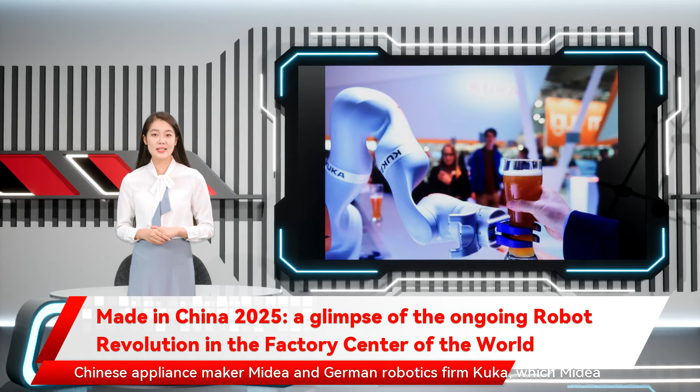Just a few miles away, work is underway on an 800,000 square meter, 10 billion yuan industrial estate that will house three ventures between Chinese appliance maker Midea and German robotics firm Kuka, which Midea bought in 2016. The new complex will have the annual capacity to produce 75,000 industrial robots by 2024.

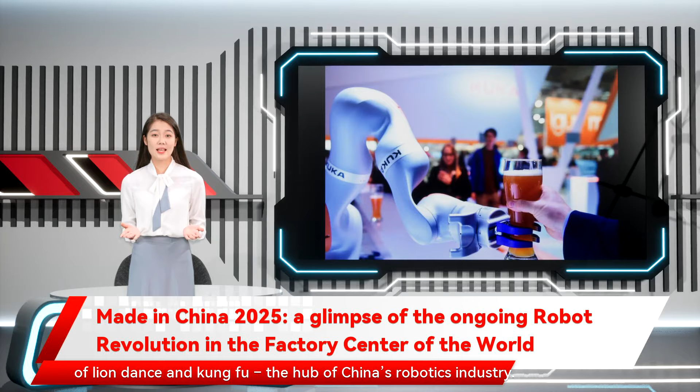Jaten and Midea are among the biggest players helping to make Foshan, a city of 7 million people best known as the home of the Cantonese style of lion dance and kung fu, the hub of China's robotics industry.

Under the Chinese government's Made in China 2025 Industrial Master Plan, the number of industrial automatons operating in the country would expand tenfold to 1.8 million units by 2025, when up to 70% of the robots used in China would be made in the country, from half in 2020, and 30% now.

It's an ambitious, multi-billion-dollar pursuit. Sitting on the western bank of the Pearl River, with Guangzhou City to the north and Shenzhen to its east, Foshan is at the heart of southern China's manufacturing industry.

Guangdong province is China's largest regional economy, accounting for 10.4% of the country's 2016 gross domestic product and 11.4% of the industrial base, according to the Statistics Bureau.

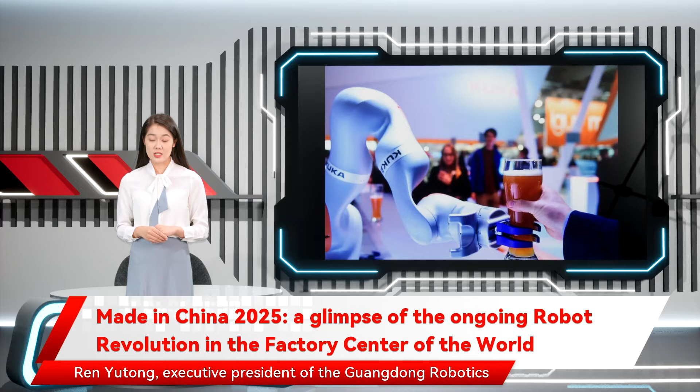China is the factory of the world, and there are millions of manufacturers that still depend on traditional labor-intensive methods, said Ren Yutong, executive president of the Guangdong Robotics Association, a government think tank. If the country wants to maintain its top spot as a global exporter, each Chinese manufacturer has to start replacing humans with robots, due to skyrocketing labor costs, and the aging population has already started running out of workers.

The number of domestically made industrial robots sold in China rose 58% last year to 141,000 units, according to government statistics. China's aggressive AI investment spurs thirst for talent, says report.

Because of China's outsized workforce, the density of automation usage lags other countries, 68 robots per 10,000 industrial workers, compared with 631 bots for every 10,000 manufacturing staff in South Korea, the global leader in automation. Singapore, Germany and Japan all have higher densities of automation than China.

China wants to more than double that usage density to 150 for every 10,000 workers by 2020. To do so would require massive amounts of government help.

The Guangdong provincial government offered 943 billion yuan in subsidies between 2015 and 2018 to help local manufacturers automate. Further up north in Zhejiang province, local authorities have set aside 800 billion yuan to spur 36,000 enterprises to make a similar switch by 2020.

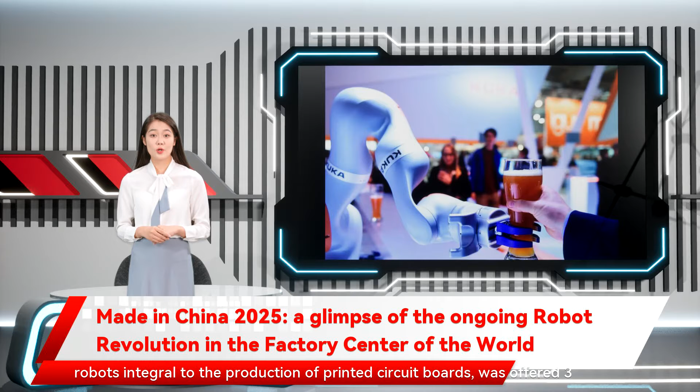Zotec, a Dongguan-based producer of auto-cutting laminator robots integral to the production of printed circuit boards, was offered 3 million yuan last year from the municipal government, and another 1.5 million yuan from the high-tech area where it is located, as subsidies on 80 million yuan of sales, according to a ChinaNews.com report.

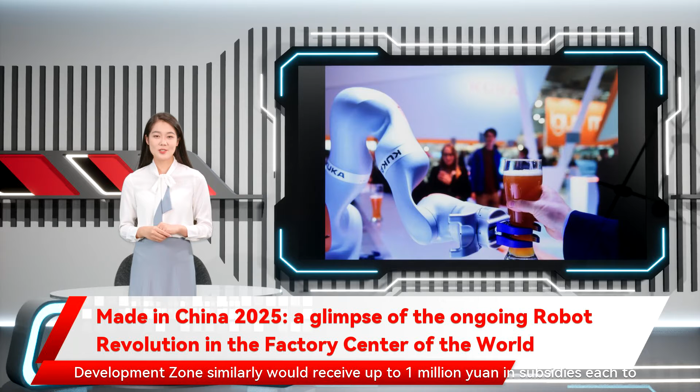Other robot producers in the Songshan Lake High-Tech Industrial Development Zone similarly would receive up to 1 million yuan in subsidies each to attend conventions and fairs on automation and robotics, the report said.

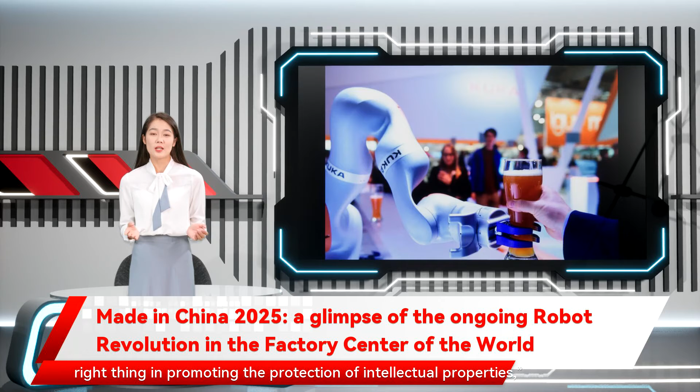The top-down approach is helping, and the government is doing the right thing in promoting the protection of intellectual properties, said Angus Muirhead, Senior Portfolio Manager for Credit Suisse's Global Robotics Equity Fund in Zurich.

Made in China 2025. Is Beijing's plan for high-tech dominance as big a threat as the West think it is?

The opening of the government tap is a bonanza for robotics makers. The 400 companies of the Guangdong Industry Guild could expect double-digit sales growth for their robots for the next few years, Ren said. A skilled factory worker earns about 36,000 yuan a year in wages and benefits in China's poorer provinces and second-tier cities, away from the coast.

Total remuneration can exceed 60,000 yuan in cities nearer the coast and along the eastern seaboard, like in the Pearl River and Yangtze River Delta.

A 200,000 yuan robot that can do the job of 3 humans can recoup its capital cost in 22 months in central provinces, or in a little over a year in coastal cities. In the face of rising prices pressures for labor, energy and rents, such a cost advantage would be attractive to many manufacturers.

Jaten is one of the biggest makers of self-navigating robots used on assembly lines and warehouses, with nicknames like Bumblebee and White Dolphin.

Each robot, which can navigate autonomously along a grid in any factory space or warehouse, and can lift between 500 kilograms to 40 tons of load, costs between 100,000 yuan and 1 million yuan.

Company Vice President Chen Hongbo said that with the help of generous subsidies and incentives, Jaten was aiming to increase its annual sales by 150% to surpass 1 billion yuan by 2021, when half of its production would be for export.

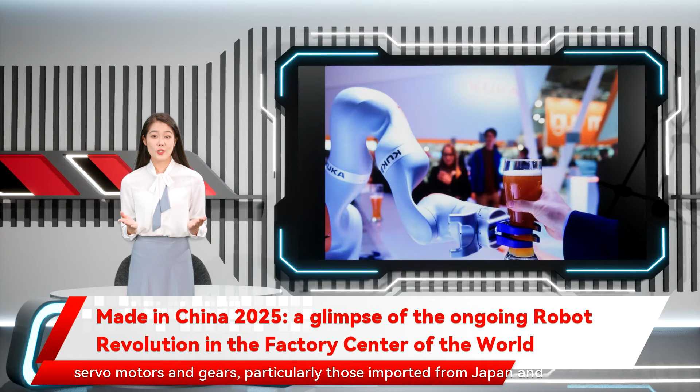Chinese component makers have been trying to localize their components, but it's easier said than done. Martin Wang, an engineer who formerly worked for a Shenzhen-based tech startup as a robotics integrator, said his team spent years studying and dismantling robot-related core parts in the hope of understanding them. But they failed and could not even reassemble and restore function because it's not simple. It takes technological know-how and talent accumulated over decades, Wang said.

China's total spending on research and development is estimated to have risen 14% last year to 1.76 trillion yuan, according to the Ministry of Science and Technology.

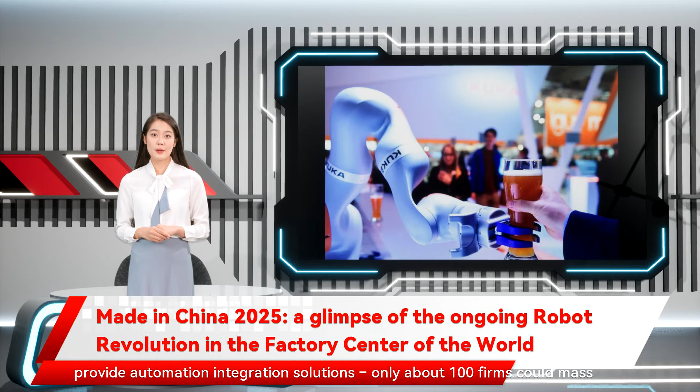But mass manufacturing was still out of range for most of China's robotics producers, said Luo Jun, chief executive of the International Robotics and Intelligent Equipment Industry Alliance, a government think tank on smart manufacturing. Among the thousands of so-called Chinese robotics companies, including robot and automated equipment producers as well as those who only provide automation integration solutions, only about 100 firms could mass-produce the main body and core components of high-end and middle-market industrial robots, such as servo motors, robot controllers and speed reducers, he said.

We lack original research and have already tried to catch up by copying advanced technology. But neither technology-related mergers and acquisitions nor copycat methods can close the gap in the short term.

It is this opportunity that has prompted F&P Robotics, a pioneer in robotic arms, to expand its Chinese operations. It has offices in Beijing and Shanghai, in addition to Stuttgart, Germany, and its head office in Glattbrugg, Switzerland. The Swiss company even added the Chinese language to its corporate website.

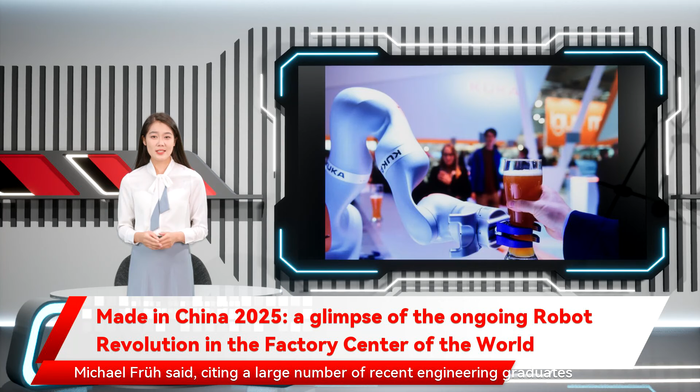We believe the gap is narrowing, F&P's chief financial officer Michael Früh said, citing a large number of recent engineering graduates with robotics training and gains made by Chinese robot component manufacturers with quality and price. Europe still has a competitive advantage through a deeper understanding of robotics and all its aspects including AI, its integration and collaborative interactions with humans.

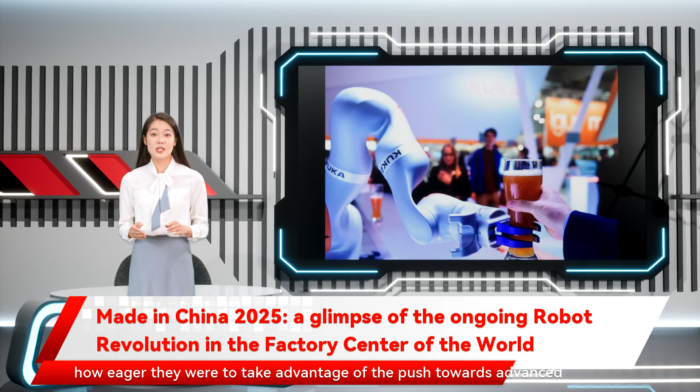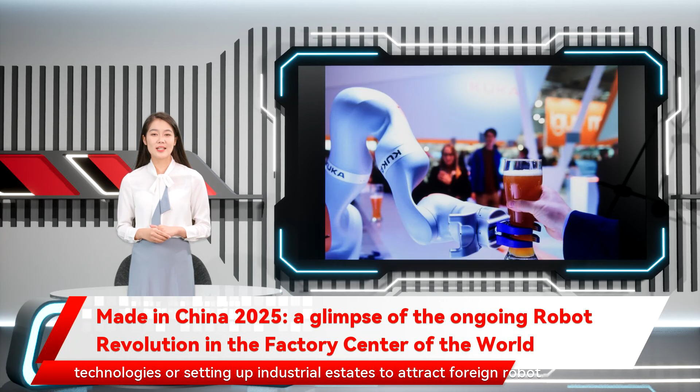Some Japanese companies such as Mitsubishi Electric and Fujitsu had also been forging strategic partnerships with Chinese firms, showing how eager they were to take advantage of the push towards advanced manufacturing in China's huge market, said an analyst with a Japanese financial firm. But Luo warned that most robot makers and local governments in China were pursuing short-sighted plans that focused on investing in existing technologies or setting up industrial estates to attract foreign robot manufacturers, rather than supporting original core research on the next generation of robots.

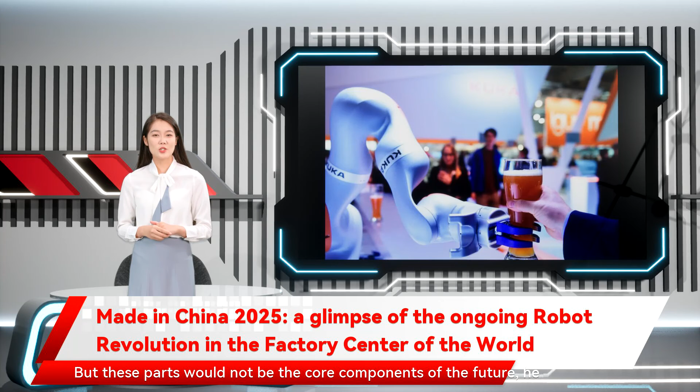He said many domestic robotics manufacturers were still developing the traditional core parts of robots, like servo motors, robot controllers, and speed reducers. But these parts would not be the core components of the future, he said. In the near future, new technologies for AI robots will begin to emerge at leading tech companies, Luo said. That's the real direction of smart manufacturing.

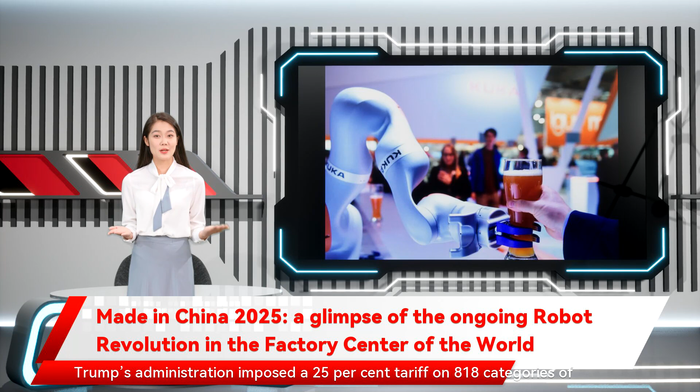Nevertheless, China's efforts to wean itself off imported components are unlikely to be affected by the trade war with the United States. In the first salvo of the US-China trade war, US President Donald Trump's administration imposed a 25% tariff on 818 categories of Chinese exports, including China-made robots.

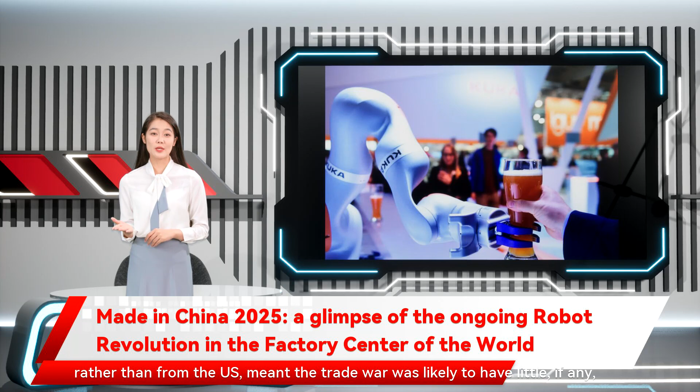I do not think it will hurt China's robotics industry. The US is not a major player in industrial robotics.

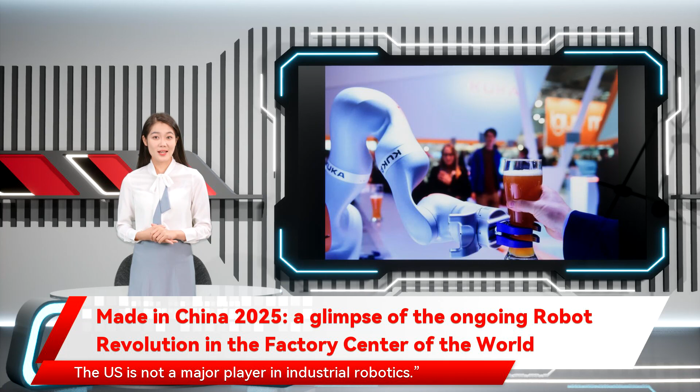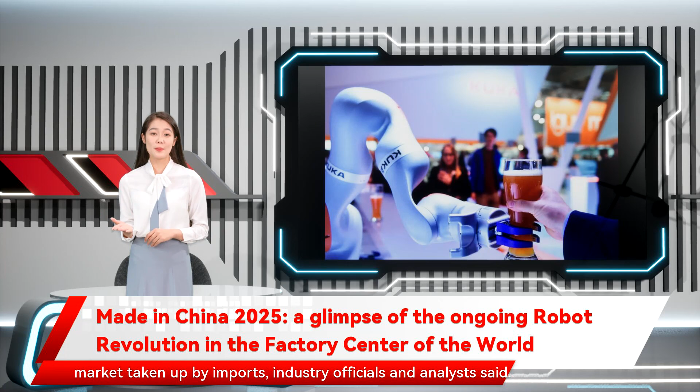Ren of the Guangdong Robotics Association agreed. The export scale of China-made industrial robots to the US is too small to have an effect on Chinese robot makers, he said. Instead, the focus now for Chinese authorities was on improving the quality of domestic robots to claw back some of the 70% share of the home market taken up by imports, industry officials and analysts said.